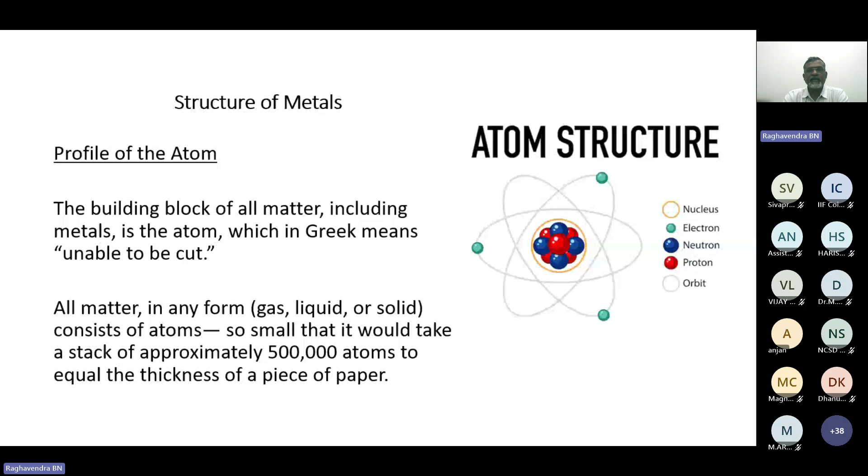This is basic, and you know that these atoms bond together to create a solid crystalline structure in metallic bonding. So in metallic bonding, these atoms bond to create a solid crystalline structure. Whatever valence electrons we see here in the atomic structure, in a metallic bond these valence electrons we call a sea of electrons. They are moving around, and still they help the atoms to create a bond.

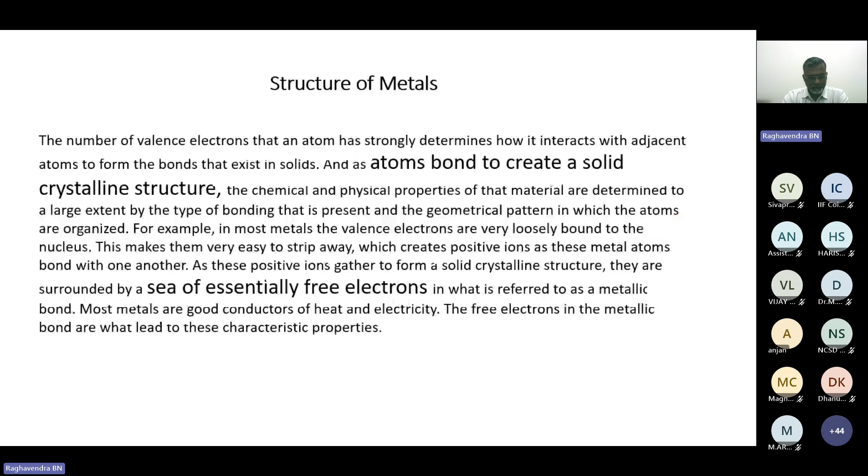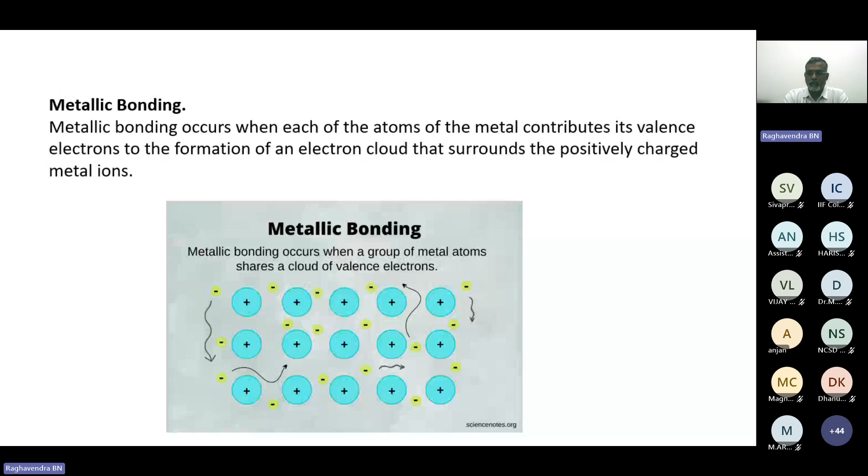That is why we know that all metals are good conductors. If you heat, the heat will pass from one side to the other, and if you pass a current, electricity will pass. That is because of the metallic bonding. These are made up of atoms. This will have a crystalline structure.

What do you mean by crystalline structure? Whenever we cool from the liquid state, in a crystalline structure, as you are seeing in the picture, it will arrange in a perfect crystal lattice structure. So it will have a perfect arrangement. All metals and ceramics generally have a crystalline structure, whereas glass and polymers will have a random structure. It will not be an arranged structure. Atoms will not be in order. So we know it as amorphous material. So metals and ceramics are crystalline structures.

If I want to write down this atomic arrangement in 3 dimensions, generally we call this a space lattice. Here every atom has identical surroundings, and this we call a space lattice. In this space lattice, if I identify the smallest area which repeats to form the space lattice, that is known as the unit cell. This we have learned. So this is the unit cell, and basically there are 7 basic crystal systems: simple cubic, tetragonal, orthorhombic, hexagonal, triclinic, monoclinic, rhombohedral. These are the crystal systems.

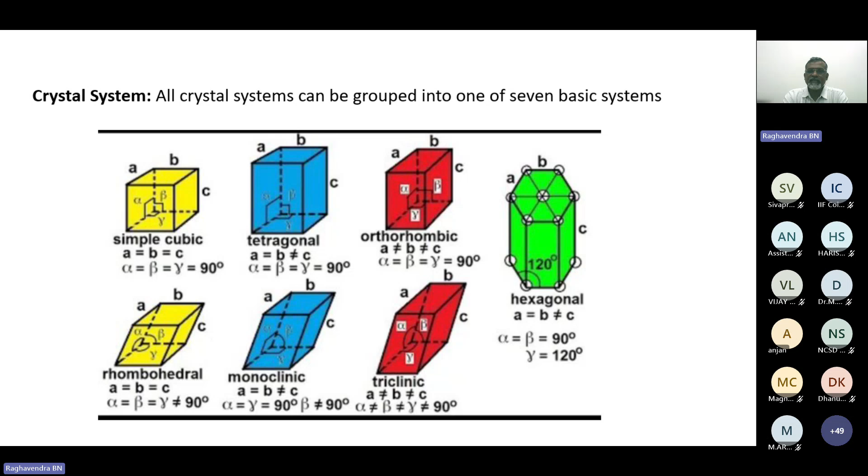That means whenever the small atoms we discussed are in the metal, they will arrange in crystal systems. In general, we discuss three crystalline structures: body centered cubic, face centered cubic and hexagonal close packed. So what is body centered cubic and face centered cubic? If you see, there is one atom at the center. This is body centered cubic, and all the corners will have atoms. In face centered cubic, all faces will have one atom and the eight corners will have atoms, and likewise in hexagonal.

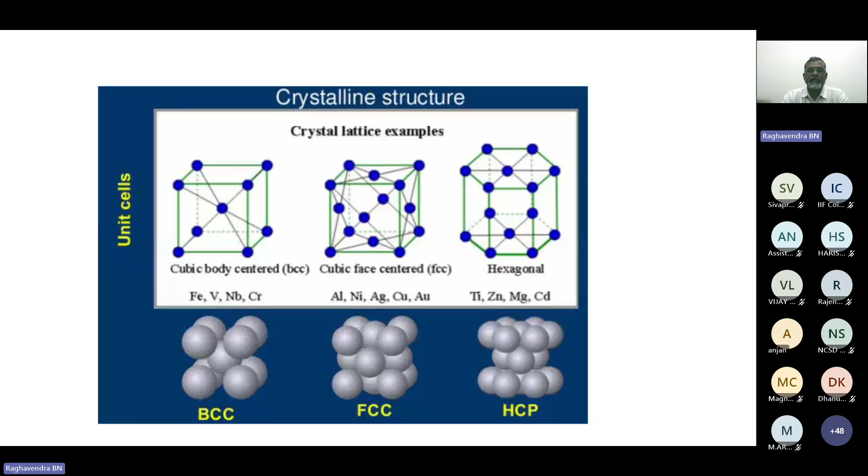So this is what a unit cell of BCC, FCC and HCP looks like. And just now we understood that it has identical surroundings. That means the next unit cell is sharing its atoms. When I take a unit cell in a three-dimensional view, it looks like this. This is FCC, and this is BCC and HCP. Here only a portion of the atom is within this unit cell, and the other portions are shared with the neighbouring unit cells. So there are some voids you are observing, some gaps.

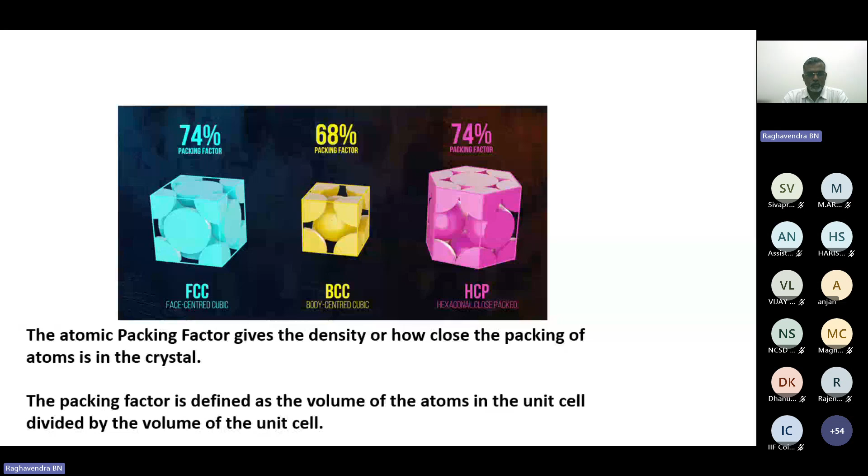So we can calculate how much volume of the atoms is present in a particular unit cell. This we call the atomic packing factor, the volume of the atoms in the unit cell. For FCC it is 74% and HCP also 74%. For body centered cubic it is 68%. This is basic, you all know this. Just to start with, I'm discussing these points.

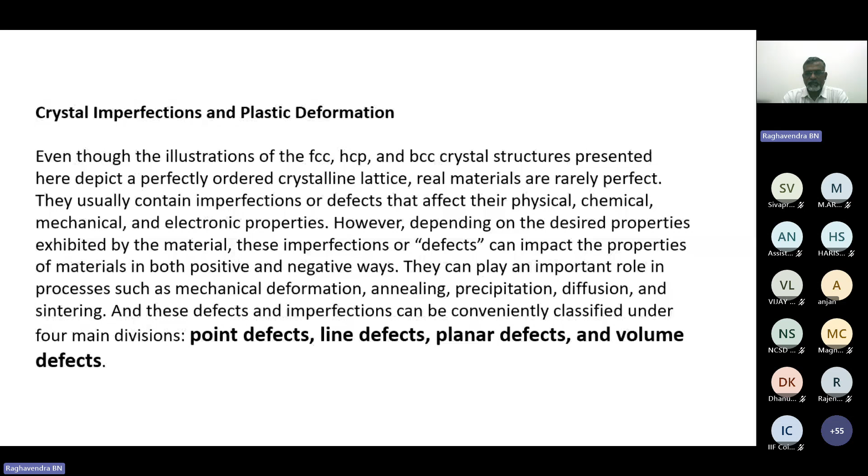Just now we understood that whenever a metal cools down, it will form a crystal structure. But the crystalline structure we have seen here is a perfect order. Generally, metals will not have a perfectly orderly arrangement like this. They will have some defects. You all know there are four types of defects: point defect, line defect, planar defect and volume defect. These are the four types of defects.

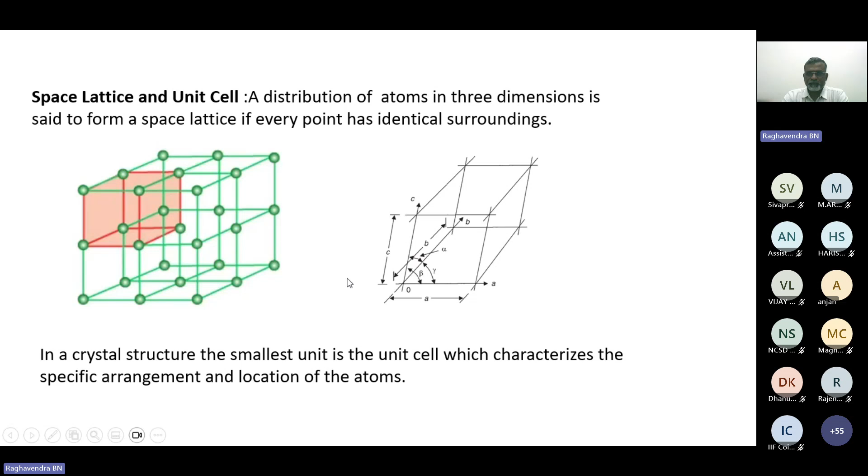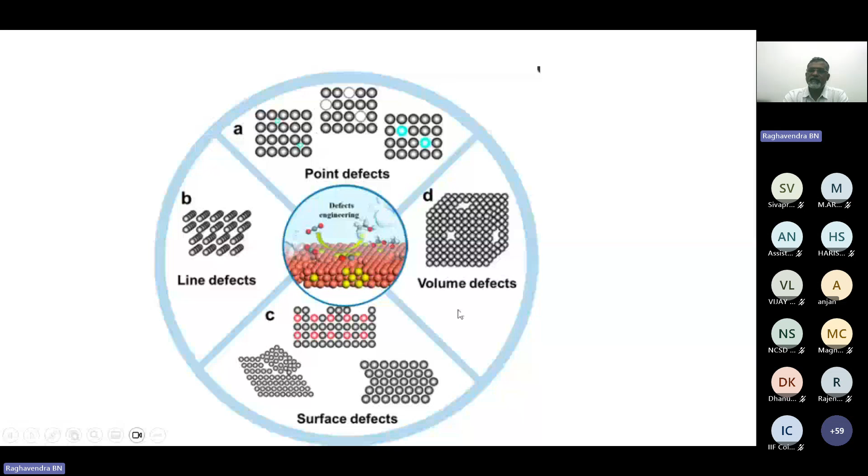Here one atom is missing, so this is also a defect. Here some bigger size atom is sitting. Since it is occurring at a particular point, we know it as a point defect. And if the small atoms go and sit inside the voids, we call it an interstitial alloy. If you compare with iron, carbon has a smaller atomic radius, so it can go and sit in the void. So we call it an interstitial alloy.

Substitutional alloy means an atom of the same size or slightly bigger size will replace an atom. So we call it a substitutional alloy. Here we need to understand one thing: even though it is a point defect, we use this defect for changing the mechanical properties of steel or cast iron castings. How can we change them? For example, you all know heat treatment. We do case carburizing.

When we do case carburizing, the carbon atoms go inside through a diffusion process and sit in the voids present in the face centered cubic structure. So this point defect we are using for changing the mechanical properties.

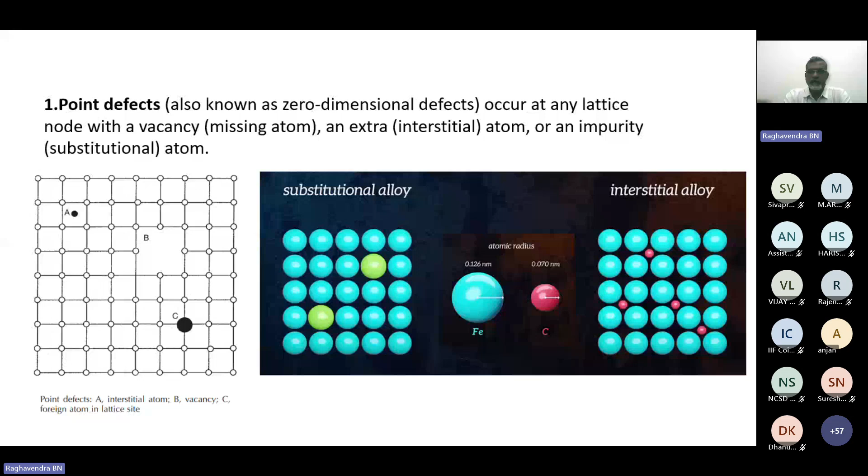See here, the surface or planar defect: you all check the microstructure of castings or steel daily, and that is basically a surface or planar defect. How does this defect occur? Just now we discussed body-centered cubic. Consider that all these crystalline structures we are seeing are body-centered cubic. But while cooling, if you see carefully, the orientation of this and this is different, even though the crystal structure is the same.

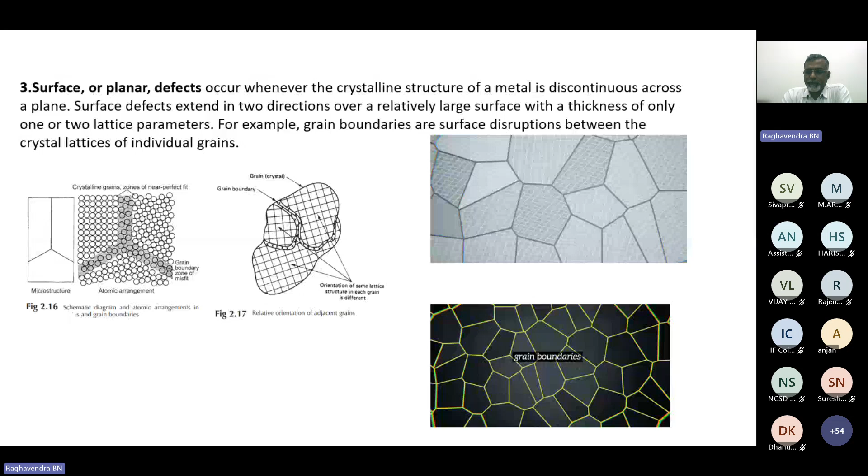Whenever there is an orientation difference, a gap occurs, and that area we call a grain boundary. So these are the grain boundaries, and these are the crystal structures. Because of the different orientation, it will have a planar defect. And this planar defect we also use to change the mechanical properties by changing the grain structure. So this is a grain boundary, and a single individual area we call a grain.

So as we discussed, point defect, line defect: if there is no line defect, we cannot give deformation. The material will not move. So line defect is required. Point defect you can use for changing the mechanical properties; you can diffuse different metals inside depending on the size. And the planar or surface defect we use to change the mechanical properties by changing the grain size.

Volume defect is actually not acceptable in any metal, like cracks, inclusions, micro cracks or porosity. So this is not acceptable. For porosity in castings, it depends on the area and how much, and there will be some acceptance criteria. But generally, volume defects reduce the strength of the metal, so they are not acceptable.

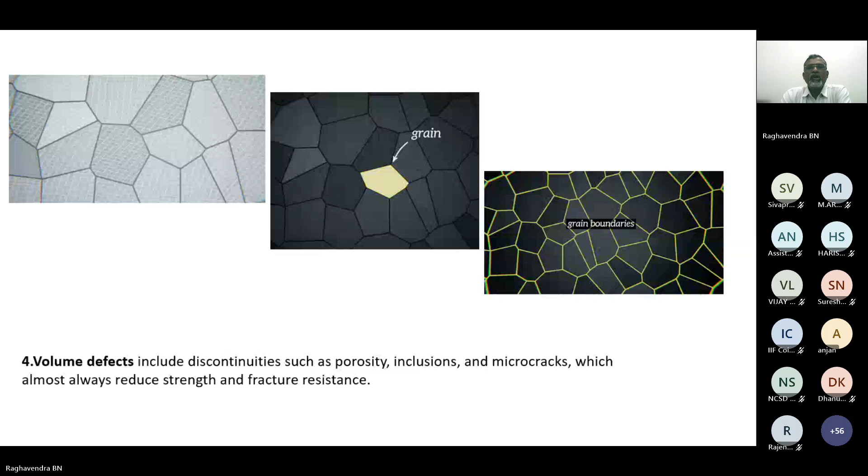In metallurgy, we should understand one term called solid solution. Generally, in our thinking, solution means something liquid. But in metallurgy, solid solution means there will be two elements. First let us discuss a regular solution: take water and sugar or salt. When we add sugar to the water, it will mix, so it has become one solution.

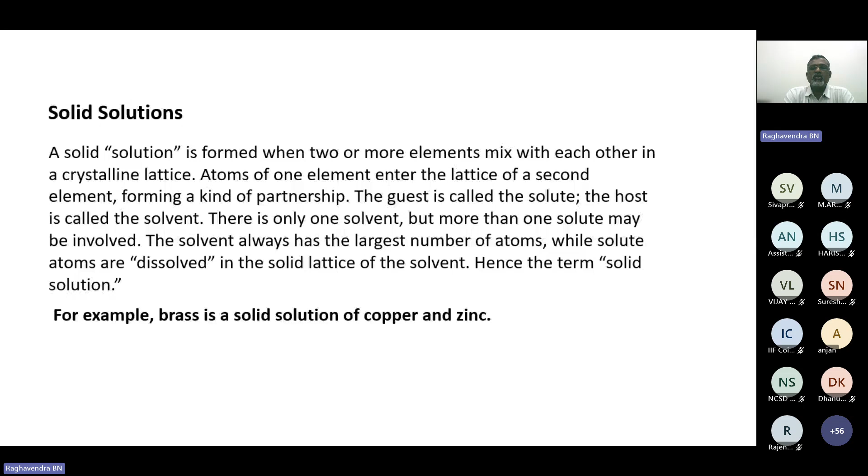Likewise, we can mix two or more elements in metallurgy and it will become a solid, so that is known as a solid solution. In the water sugar example, water is the solvent and sugar is the guest we are adding. The guest is called the solute, and the host is the solvent. Likewise, brass is an alloy of copper and zinc. We call it a solid solution of copper and zinc.

Now, by understanding this, you should understand solubility. This is one more term, solubility. For example, whatever we discussed regarding water and sugar.

If I take 50 ml of water and add sugar, say one or two spoons, it will dissolve. And if I keep on adding, at a particular quantity of sugar it will not dissolve. Then we may have to heat it, and after heating also, if you keep adding without adding water, there is a certain limit. After that, dissolving will not happen. It is just a mixture.

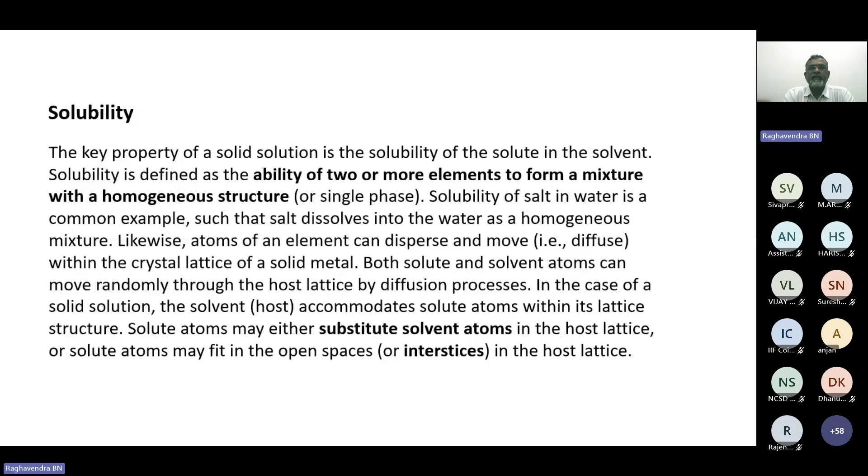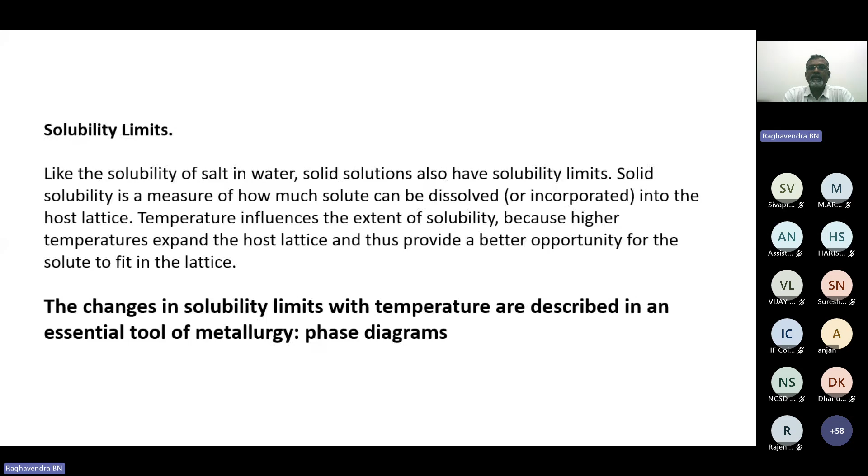Like that, in metals also there is a certain quantity we can add, a certain percentage, depending on the elements. That is known as solubility. In metallurgy, these solubility limits, how much we can add, how much it can take, we understand through phase diagrams: the phases at different temperatures, whether liquid or solid, and what the crystal structure is. So this is a tool in metallurgy. We have learned the iron carbon equilibrium phase diagram in college and school.

So what is a phase diagram? Basically, it is a graphical representation of the different phases present in an alloy at different conditions of temperature and chemical composition.

I hope I'm not going fast. Is it okay, this much speed? Hello? It seems to be okay, sir. A little bit slower, sir. Okay, maybe for some initial new people.

So now let us understand what the iron carbon equilibrium phase diagram is. In metallurgy, in the iron carbon equilibrium phase diagram, equilibrium means very slow. An extremely slow process is known as equilibrium. For example, if I want to heat the metal from 30 degrees to 31 degrees, increasing the temperature by 1 degree, I may take around 4 to 5 hours. That much slow process is equilibrium.

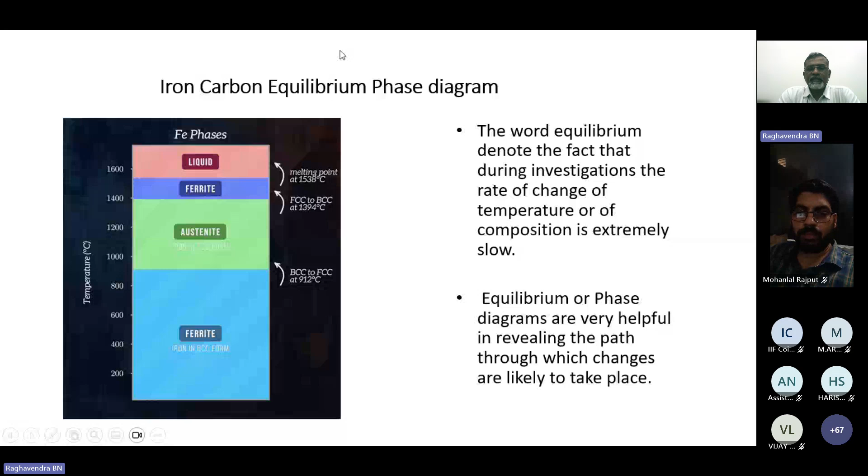It is not mentioned here, but 6.67% means we can add up to 6.67% carbon into iron. Above that, it is not a solid solution, it is just a mixture. So with this phase diagram we understand that we can add up to 6.67% carbon, and the different phases we will discuss later.

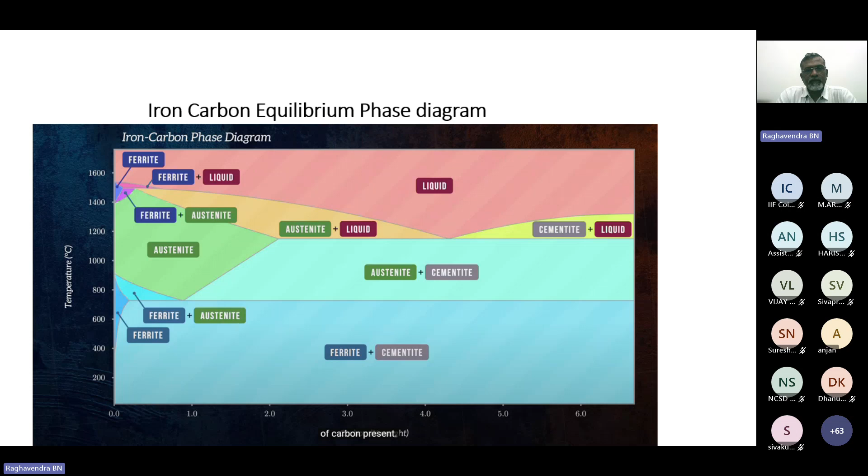Now we will understand what is ferrite. See, ferrite is actually a Latin word taken from ferrum. It is a BCC structure, body centered cubic structure. We call it alpha iron. We should know this to understand the iron carbon diagram. There are different phases like ferrite, austenite, pearlite, which we are going to discuss. So ferrite is body centered cubic.

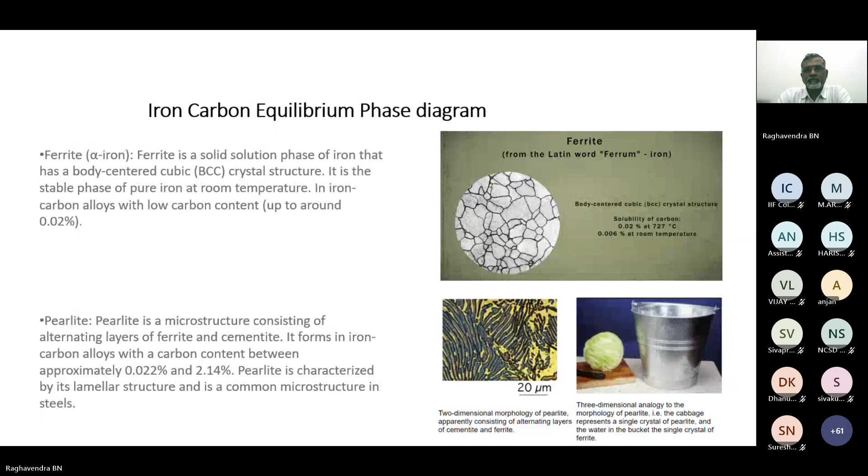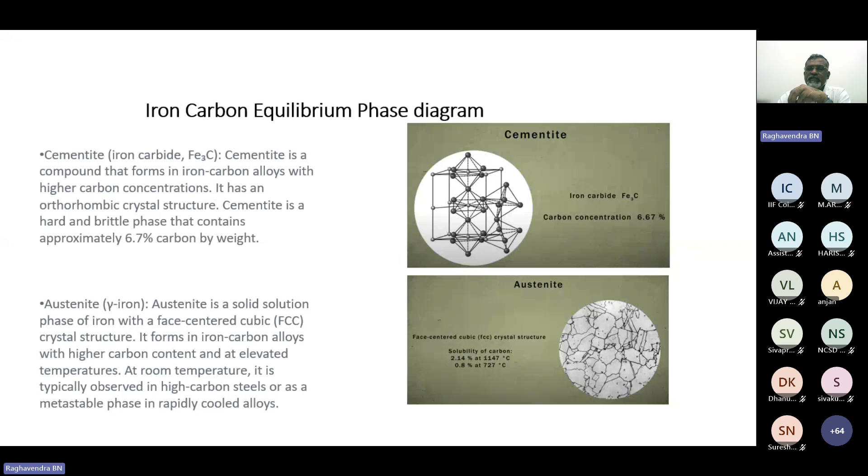Cementite is orthorhombic, we call it Fe3C. It has 6.67 or 6.7% carbon. Austenite occurs at a higher temperature. It is a face-centered cubic structure, FCC. Now, in the iron carbon diagram, up to 2% carbon we call it steel, and more than 2% up to 6.67% we call it cast iron.

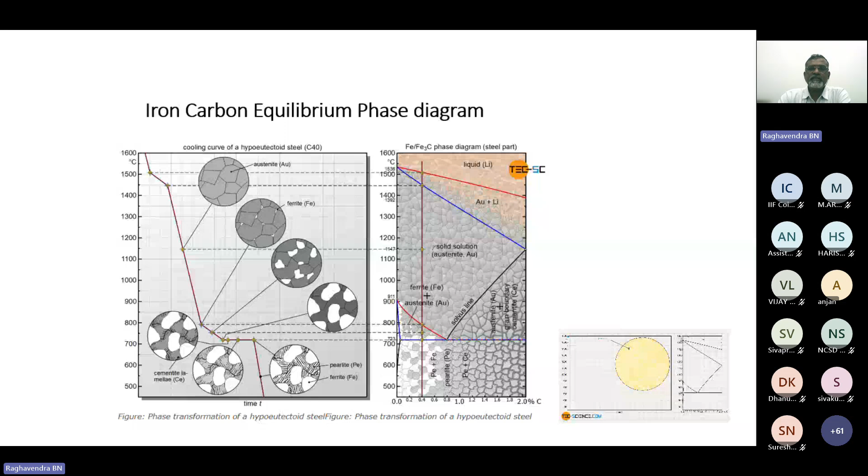That means we add 0.4% carbon into the iron, that is 0.4% carbon steel. When we go on heating, this is how the transformation takes place, and it is a reversible process. If you go on cooling, the same phase transformation will take place. We will see this through this video. Actually it is equilibrium, which is very slow, but this is just for understanding.

You see here, this is completely liquid. Now when it touches this point, this is liquid plus austenite. This is how the crystal grains grow. Now it is completely solid, austenitic structure. Now we are slowly cooling it. Once it touches this temperature, austenite plus ferrite transformation takes place, and this is the 723 line, the critical temperature line. Below this it will be ferrite and pearlite. This is around 0.4% carbon. This is how the transformation takes place at equilibrium.

Equilibrium is very slow. Now if you heat it from room temperature to the melting point, the same process will repeat. If we slowly heat it, the ferrite and pearlite above 723 will transform to austenite and ferrite, and when it crosses around 830, 840, it will convert to austenite. Then it becomes austenite and liquid, then completely liquid. This is how the phase transformation takes place.

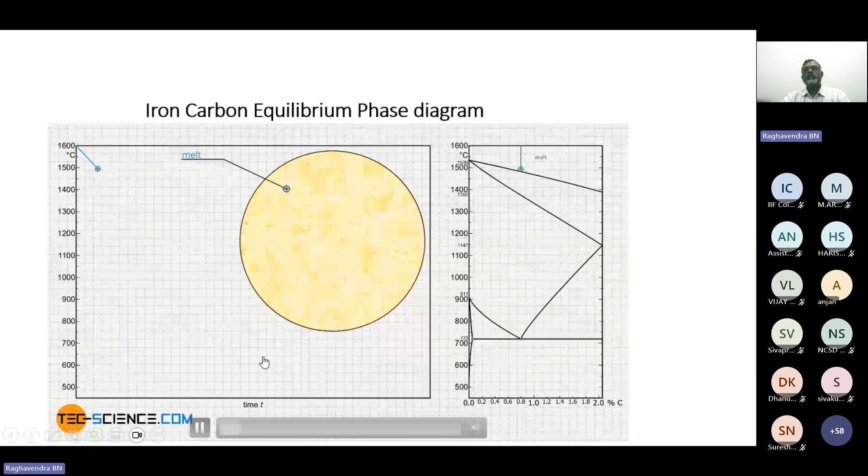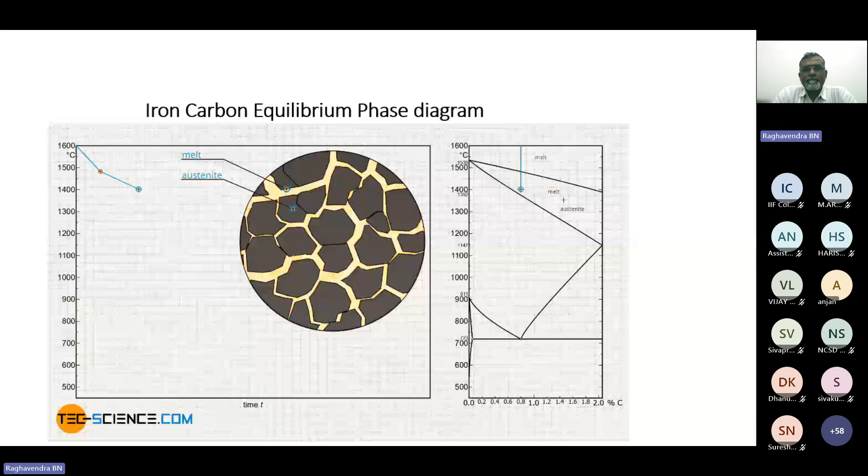For example, for 0.8% carbon, it is completely liquid now. This is liquid plus austenite. Now it has become completely austenite. Austenite is an FCC structure. When it touches 723 and below, since the carbon is more, it will completely transform to pearlitic structure. Pearlite means alternate layers of ferrite and cementite.

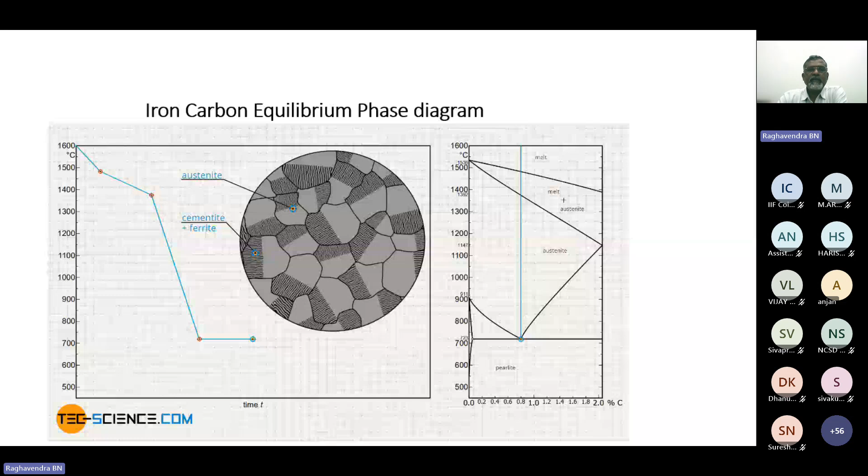This is how, in the iron carbon equilibrium phase diagram, the phase change happens at different compositions. This is 6.67%, the maximum limit. Up to 2% we call it steel and 2 to 6.67% cast iron. Now, if I want to increase the cooling rate: equilibrium means slow cooling, and with slow cooling ferrite and pearlite will form.

But when I change the cooling rate, with sudden cooling, rapid quenching, we get martensitic structure if the carbon percentage is low, and with moderate cooling we get a bainitic structure. Generally in any iron carbon equilibrium diagram you will not see bainite or martensite, because to achieve martensite we have to do rapid quenching, and rapid quenching will not have an equilibrium phase. Equilibrium means very slow. So when we do very slow cooling, we get

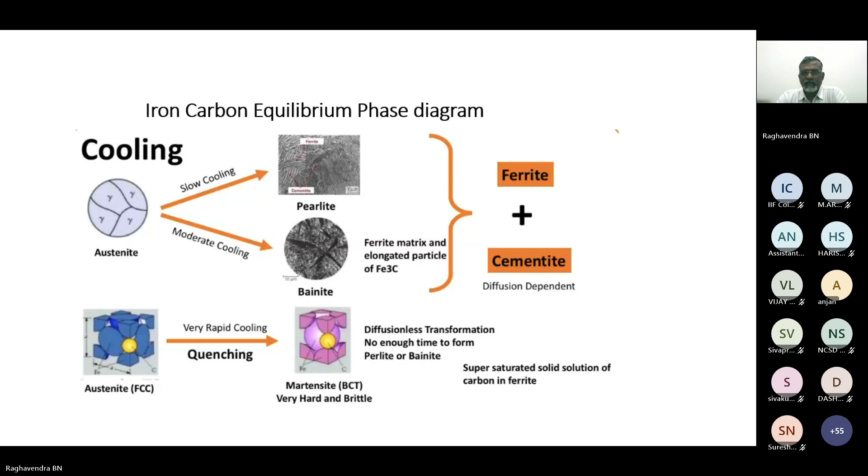Yes, sir. It got disconnected, no? Yes, sir. You can proceed, sir.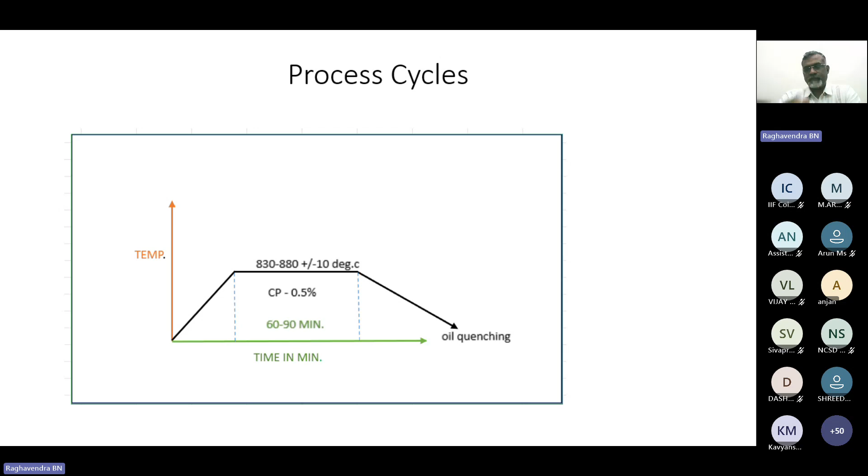See, this is actually a heat treatment process cycle. Can anybody tell what the heat treatment process is here? Oil quenching. Hardening. Hardening, right? So here the process is hardening, and they have selected 830 to 880 degrees. What may be the carbon percentage? Around 0.4 or something. Yeah, around 0.4.

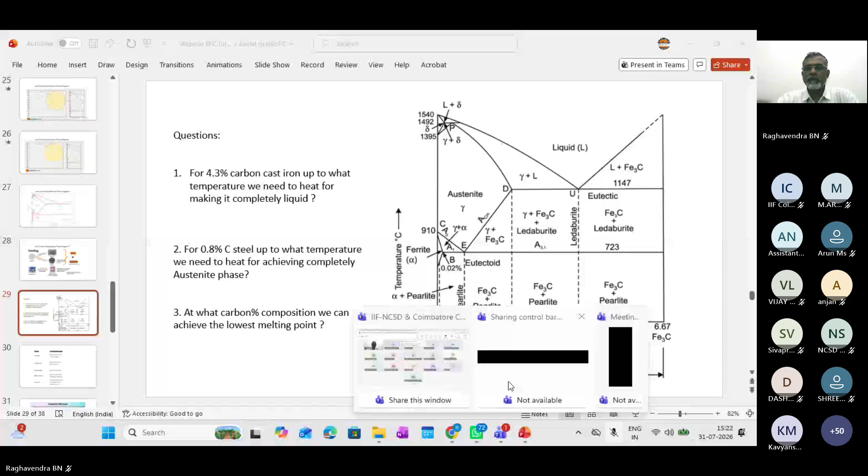Raghavendra sir, you are on mute. Sorry, I don't know how it happened. Now I am audible, right? Yes, audible. Put your PPT, sir. It is visible, right? The PowerPoint is not visible. Now it is visible. No, sir. Not yet. I have shared it. Net is slow. Now it's visible.

So what we were discussing, say I have a 0.4% carbon steel and I want to heat treat it. For hardening and tempering, we first need to go to the austenitic temperature. With this iron carbon phase diagram, for 0.4%, if you check here, this area will be around 830 to 880. Say 0.8% carbon is there, we know that above 723, even 1 degree above, it is completely austenite.

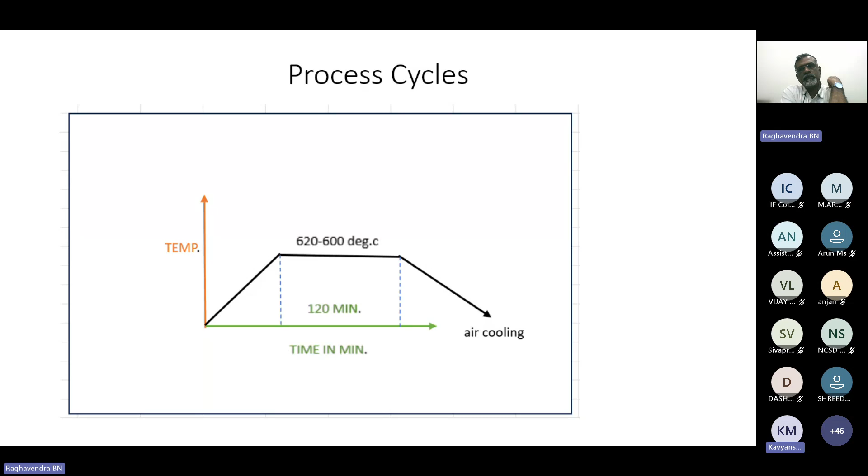And what is this process? Any idea? Stress relieving. Yeah, stress relieving. So in stress relieving or tempering, does phase transformation happen? No. Because in the iron carbon diagram, 723 is the critical temperature; whatever phases have formed will not change until you cross 723. Only if you cross 723 will phase transformation happen. So that is stress relieving.

There are actually three reactions here: peritectic, eutectic and eutectoid. In eutectic, completely liquid transforms to ledeburite, austenite plus cementite. And if you heat austenite and cementite, it becomes completely liquid, so it is reversible. This is liquid to solid. In eutectoid both are solid: austenite transforms to ferrite and cementite, or during heating, ferrite and cementite transform to austenite.

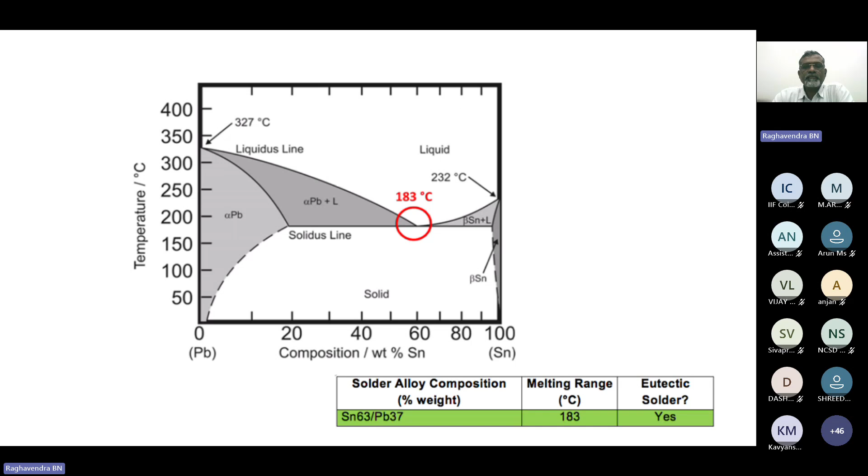Eutectoid is at 723 and eutectic happens at 1147. The peritectic reaction happens at 1492 degrees. So these are the three horizontal lines in the iron carbon phase diagram, the three reactions. What is this process? Any idea?

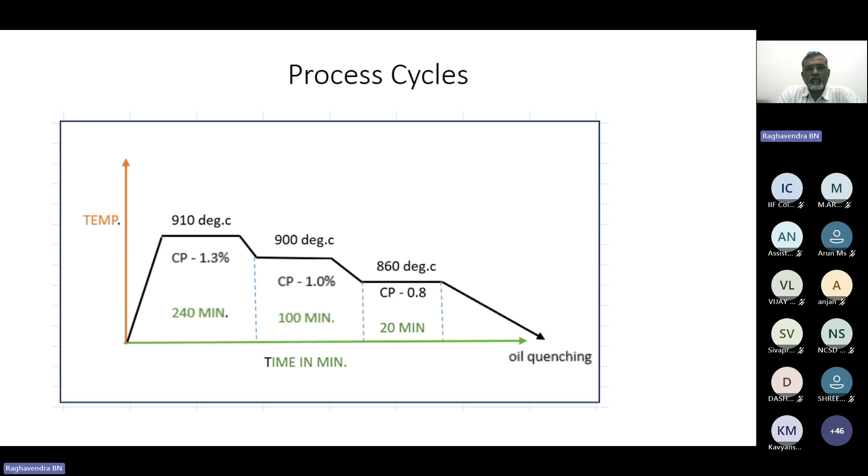It is also hardening. It is actually a case hardening process. Yes. Okay. So in case hardening, what we do is we diffuse the carbon. This is generally done for a low carbon steel, and looking at this temperature, 910 degrees, you will understand 910 degrees is required to form the austenite, meaning the carbon percentage will be very low. So at 910 we are hitting this area, which means it will be less than 0.2% carbon. So wherever carbon is not there in the steel, low carbon steel, we want to diffuse the carbon.

There we actually do the case hardening process, but for doing case hardening, first we need to convert the material into austenite inside the furnace. So how you select the temperature is based on the iron carbon diagram. That is why I am asking these questions. Okay. And what is this process? Tempering. This is a tempering process. Actually here it is a very low temperature tempering process.

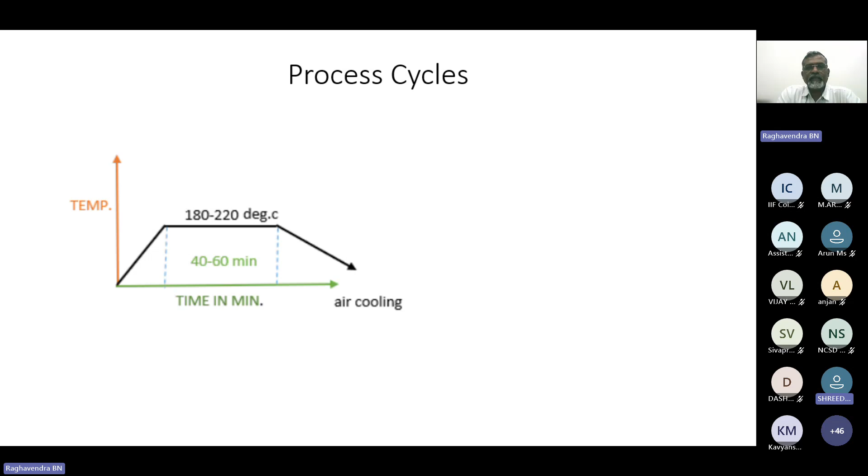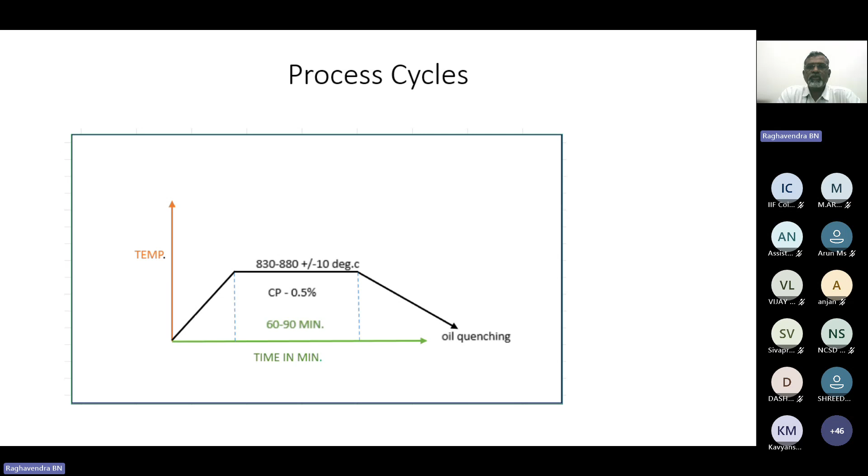Okay. Stress relief. Basically case hardening, hardening, normalizing, annealing, whatever process we do, and melting. For all these processes you should know the phase diagram thoroughly. If you know the phase diagram, whatever temperature you select, it will give you the correct results. So that is the advantage of the phase diagram.

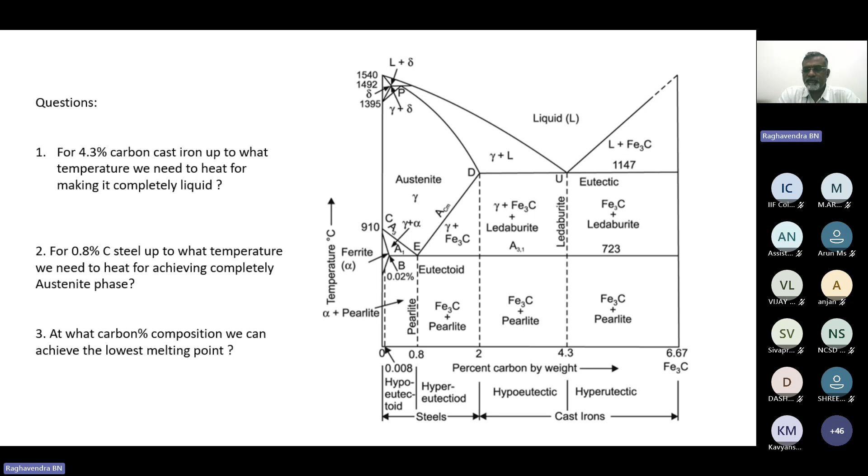Okay. I think this was simple. I hope you have understood the iron carbon diagram. If you have any questions related to the iron carbon diagram, we can discuss. Participants, if you have any doubts related to the iron carbon diagram or metallurgy, you can ask the sir so that you can clear your doubts.

Sir, can any alloy additions and mixture be called a solid solution, or is there anything specific? No, it is a solid solution only. Once we add any element, it is a solid solution. Actually, see, solution means if you taste any solution at any location, it will taste the same. That is the beauty of elements mixing in the metal. So if you check the chemistry at any location, it will be the same. That is why you can consider it a solid solution. Whatever elements you add, you can add carbon, silicon, manganese, phosphorus, sulfur. Phosphorus and sulfur are generally treated as impurities.

Alloying elements, for example, around 10 years back we had an issue of cylinder liners cracking during application in the engine, within fewer hours. In tractors, we generally give warranty in number of hours, so it was cracking within the warranty period, say within 500 hours. When we studied the reason, we came to know that the high temperature withstanding capacity was low. So to improve that, we added molybdenum. Adding some percentage of molybdenum increases the high temperature capability. So whatever element you add, like molybdenum, nickel, chrome, it is called a solid solution.